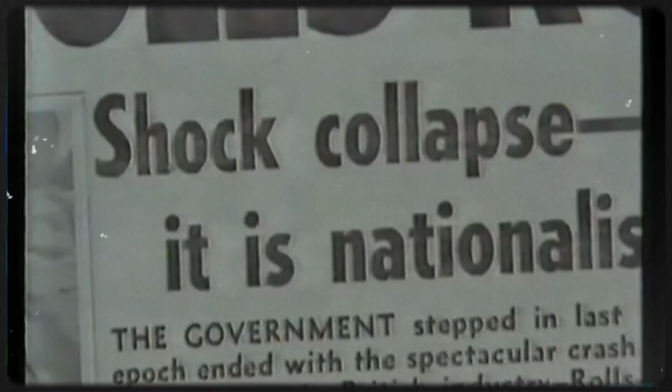On the morning of 4th February 1971, the assembly halls in Derby fell quiet. Rolls-Royce, the ultimate symbol of British engineering prestige, had collapsed into receivership. The company that built the Merlin to save Britain in wartime was now bankrupt, shattered by the financial weight of a single civil jet engine program.

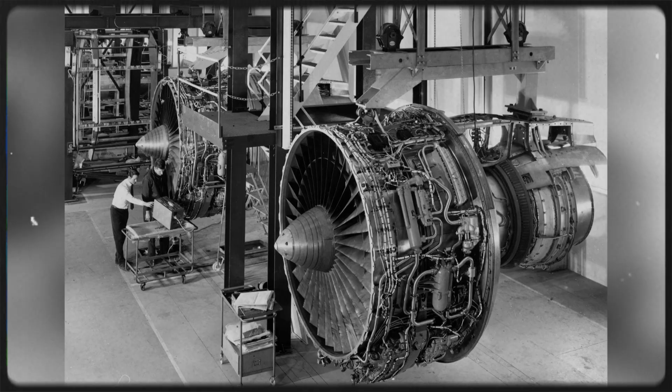The RB211, tied to a punishing fixed-price contract to power the Lockheed L-1011 TriStar, had development costs that spiraled completely out of control. Overnight, the livelihoods of thousands of factory workers and engineers hung in the balance, forcing an unprecedented emergency nationalisation by the state.

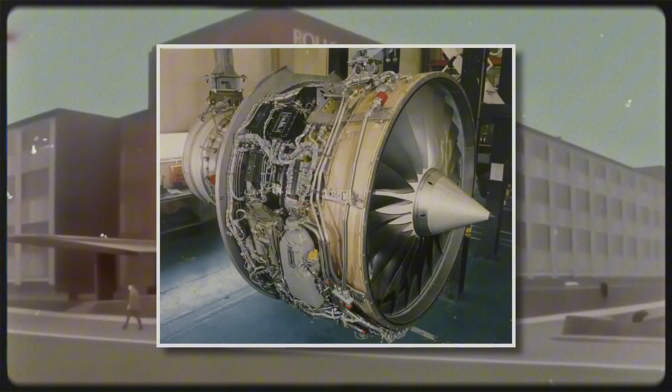It was a devastating paradox. On the test stands, the massive high-bypass turbofan was a mechanical masterpiece. Its three-shaft architecture promised to redefine global aviation. Yet that exact brilliance, relying on experimental materials and unforgiving deadlines, was bleeding its creator to death. But the real story of the RB211 is not only the story of a boardroom collapse, it is the story of how an engine that destroyed a British empire also became the only thing that could save it.

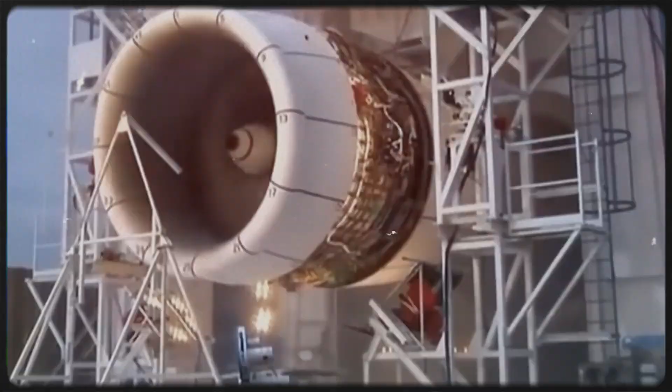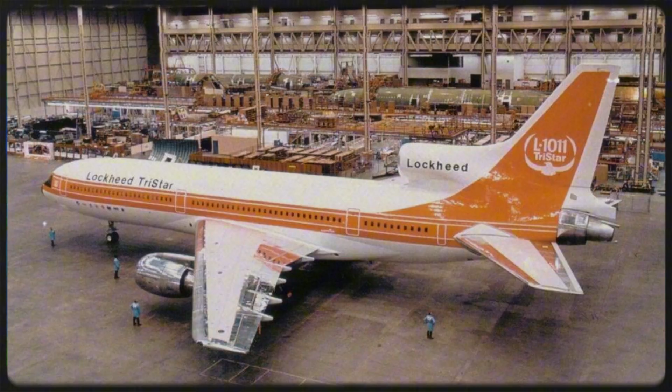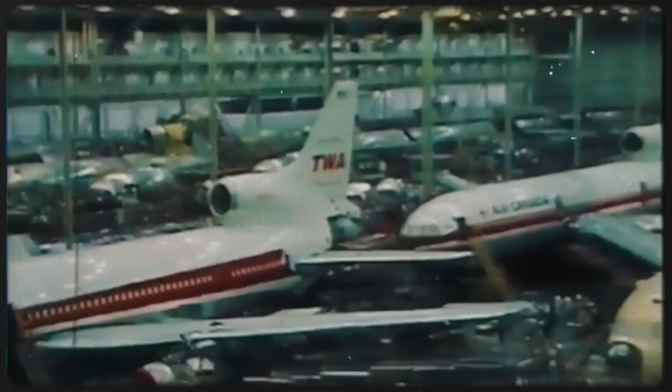The story begins not with nostalgia, but with a specific place, in Derby in 1968. In the middle of the 1960s, the global aviation market was shifting with a violence that British engineering had not anticipated. The era of the early narrow-body jet airliners, machines that had made air travel normal, was closing. Airlines were demanding a new kind of aircraft. They wanted wide-body jets capable of carrying hundreds of passengers in a single cabin, requiring a massive leap in thrust that existing engines simply could not provide.

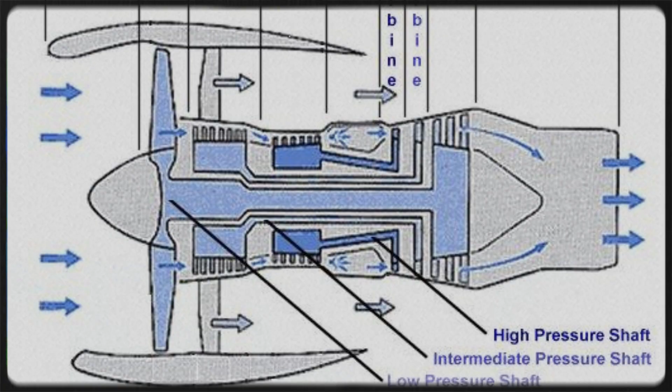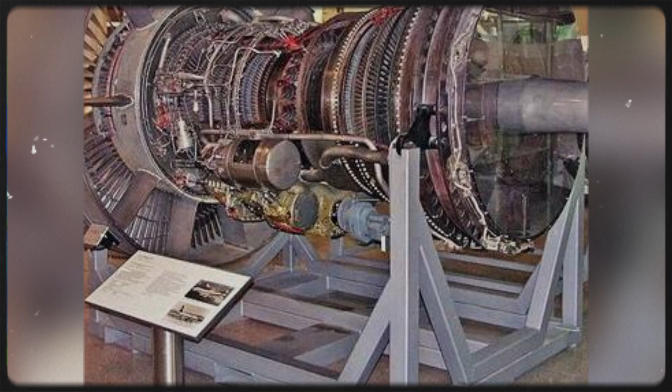To power these new giants, the world needed the high-bypass turbofan. A jet engine, a turbine engine that produces thrust by accelerating air and exhaust gases, was no longer enough. The new turbofan had to move much of its air through a large fan at the front, bypassing the core altogether. This drastically improved efficiency and thrust while reducing noise, a crucial factor as airports began facing noise restrictions.

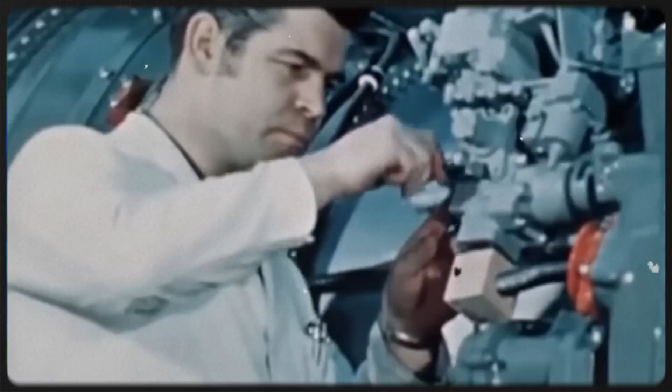In America, Pratt & Whitney and General Electric were already building these immense power plants. In Britain, there was only Rolls-Royce. For the aero engine division in Derby, the stakes were existential. If Rolls-Royce did not build a high-bypass turbofan, they would be locked out of the new wide-body market. If they were locked out of the wide-body market, they would cease to be a major global player, relegated to supplying niche aircraft and legacy fleets.

The British government, desperate to maintain its aerospace prestige, poured subsidies into Derby, demanding that the company secure a major contract to prove Britain still belonged at the top table of aviation.

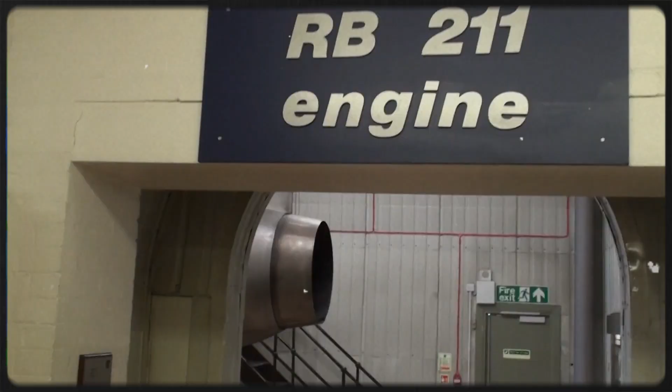The opportunity arrived in the form of the Lockheed L-1011 TriStar, a new wide-body airliner being developed in California. Lockheed needed an engine, and Rolls-Royce, driven by a mixture of engineering arrogance and commercial desperation, determined they would win the contract at any cost. In 1968, they did. Rolls-Royce secured the exclusive deal to power the TriStar, beating their American rivals. It was heralded as a triumph of British industry, a moment of national celebration.

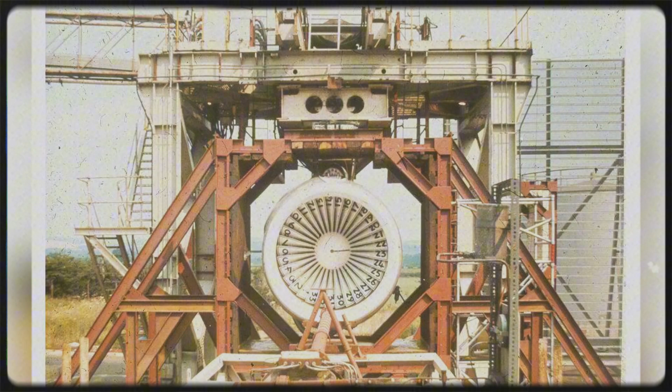But the victory was built on a foundation of terrifying risk. To win the contract, Rolls-Royce had promised an engine that did not yet exist. They promised it would be lighter, quieter, and more fuel-efficient than anything the Americans were building. More dangerously, they had signed a fixed-price contract, meaning they would absorb any development overruns themselves. And most dangerously of all, they had committed to a timeline that left almost no margin for error.

The signature was on the paper, the factory floors in Derby prepared for the future. But the British engineers still had to invent the technology to make the promises real.

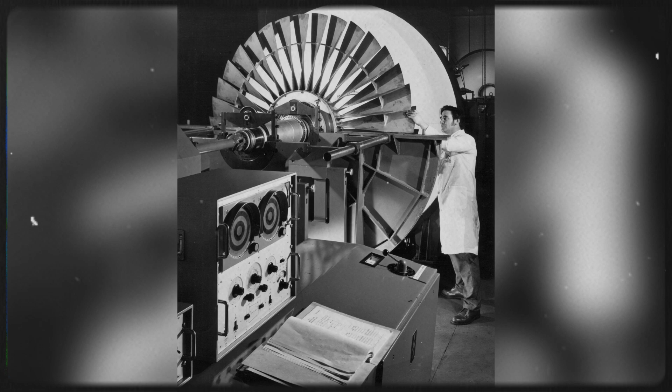In 1968, the ink on the fixed-price contract with Lockheed was barely dry. But the reality of what Rolls-Royce had promised was already settling over the factory floors in Derby. The British engineering team had committed to delivering a power plant that would outclass the best efforts of the American giants, Pratt & Whitney and General Electric.

The target was the Lockheed L-1011 TriStar, a wide-body airliner that required an engine capable of producing over 40,000 pounds of thrust. This was a colossal figure, more than double the power of the earlier Rolls-Royce Conway engines that had introduced Britain to the turbofan age.

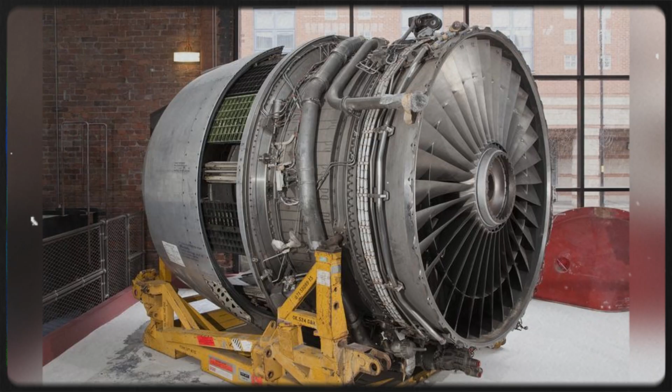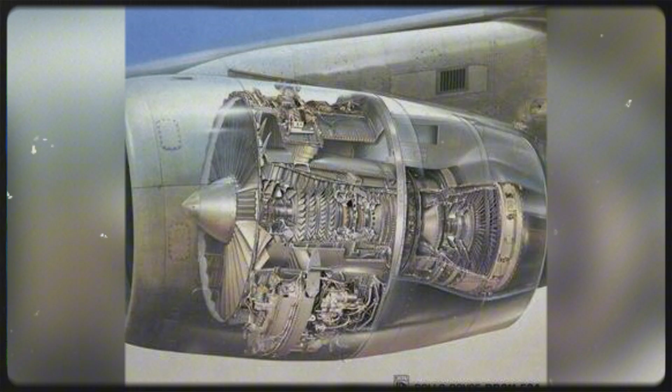To achieve this leap in power, the new engine could not simply be a scaled-up version of an older design. It had to be a high-bypass turbofan—a jet engine that moves much of its air through a large fan at the front, bypassing the combustion core altogether. This was the only way to generate massive thrust while reducing fuel consumption and noise. The vast volume of bypassed air acts as a cushion, wrapping around the hot, screaming exhaust gases from the core, silencing the roar that had defined the first generation of jets.

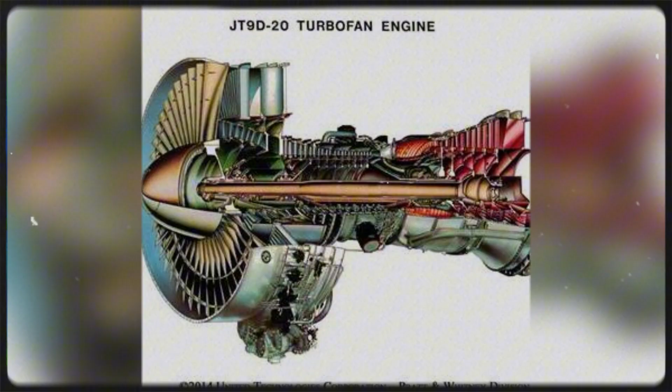But spinning a fan nearly 3 meters in diameter created a profound mechanical challenge. In America, Pratt & Whitney was developing the JT9D, and General Electric was building the CF6, using conventional two-shaft layouts. A shaft is the central spinning axis that connects the turbine sections at the rear to the compressor sections at the front. In a two-shaft engine, one shaft spins inside the other, allowing the high-pressure core and the low-pressure fan to rotate at different speeds. It was a proven, reliable method.

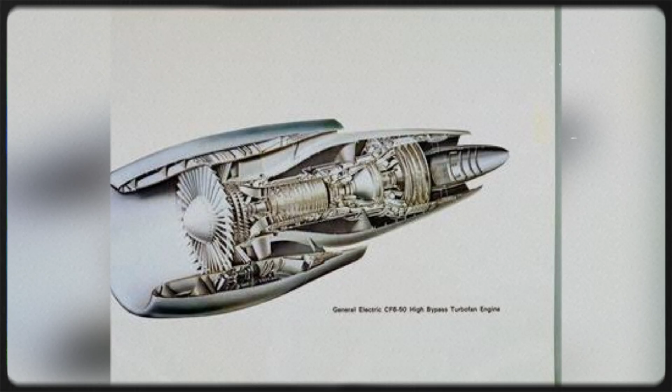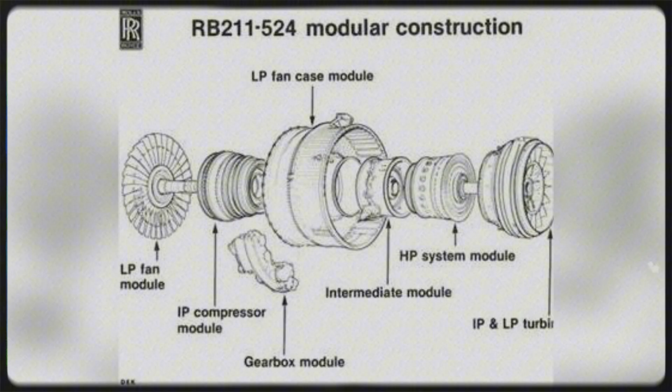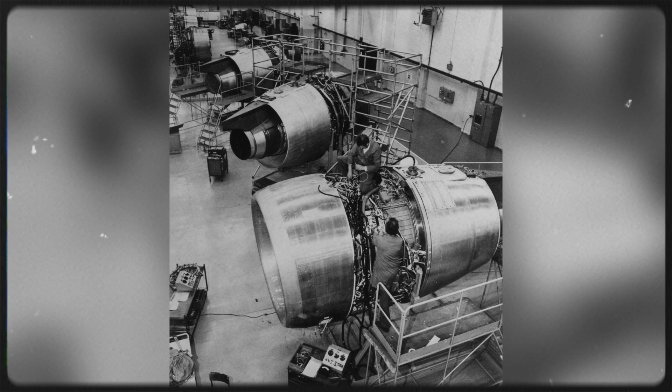But Rolls-Royce engineers, drawing on decades of aviation pedigree, decided that a two-shaft layout was too long and too flexible for an engine of this immense scale. They chose a path of radical, brilliant complexity. They would build the RB211 around a three-shaft architecture—a design where three concentric shafts spin independently inside one another. It was a mechanical masterpiece.

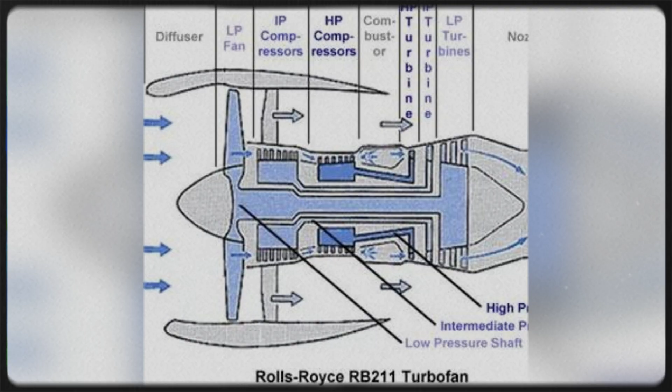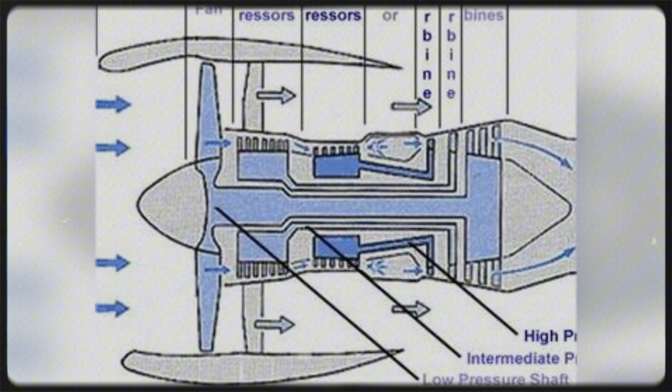In the machine shops of the Midlands, this meant an entirely new level of precision. Instead of two spinning axes, there were three: the innermost shaft would drive the massive front fan, the middle shaft would drive the intermediate pressure compressor, and the outer hollow shaft would drive the high-pressure compressor. For the machinists and fitters at Derby, this design was unforgiving—it required 3 sets of bearings, complex lubrication systems, and perfectly machined splines.

Yet the advantages were staggering. Because the engine was divided into 3 distinct thermodynamic zones, each section could spin at its own perfect aerodynamic speed. The compressor stages did not have to compromise. This allowed the engine to be significantly shorter, more rigid, and vastly more fuel efficient than its two-shaft American rivals. A shorter engine flexed less under the extreme aerodynamic loads of flight, meaning the rotating blades could sit closer to the outer casings without scraping them. Tighter clearances meant less air escaped, which meant greater efficiency.

This was the breakthrough that had won the Lockheed contract. Airlines like Eastern Airlines, Trans World Airlines, and later British Airways looked at the fuel economy projections and saw an engine that would revolutionize their fleet economics.

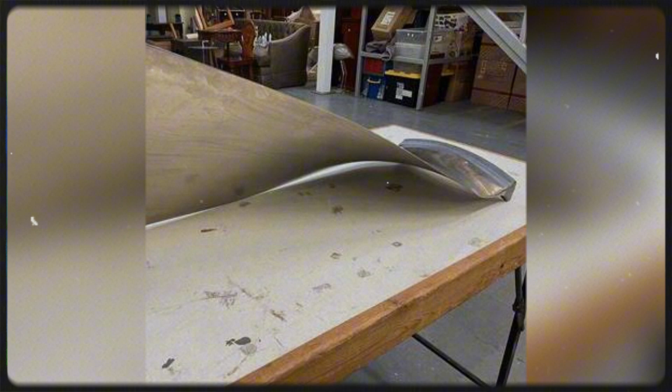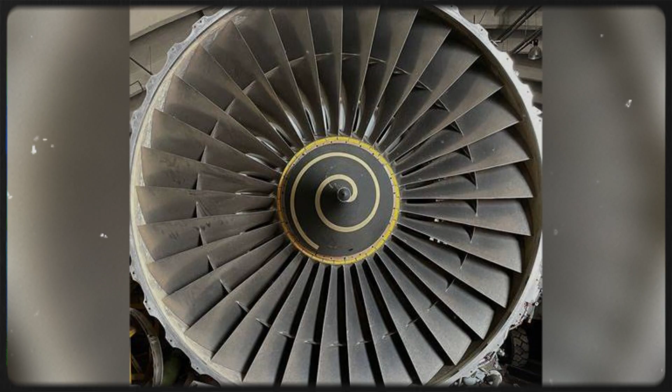But the three-shaft architecture introduced a secondary crisis: weight. The massive fan at the front of the RB211 required enormous blades. If these blades were forged from solid titanium, the industry standard material, the sheer rotating mass would be catastrophic. The fan disc holding the blades would have to be thicker, the bearings would have to be heavier, and the containment ring designed to catch a broken blade would have to be built like a bank vault. The total weight of the engine would obliterate Lockheed's strict limits, and under the fixed-price contract, Rolls-Royce would face immediate financial penalties.

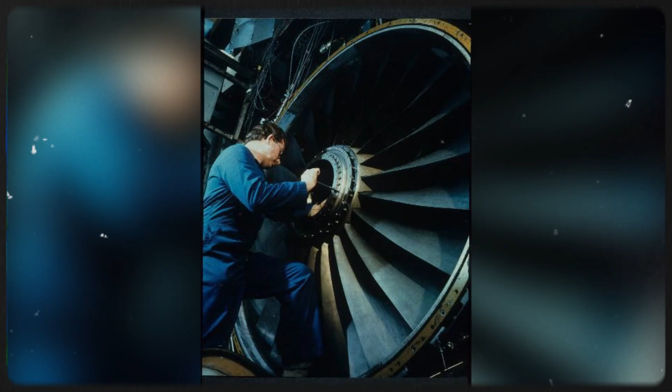To solve the weight problem, the British engineers turned to an experimental miracle material: carbon fiber. Rolls-Royce had developed a proprietary carbon fiber composite they called Hyfil. Carbon fiber, a material made of microscopic, immensely strong crystalline filaments of carbon embedded in a resin matrix, was incredibly stiff and phenomenally light. It promised a fan blade that was half the weight of traditional titanium.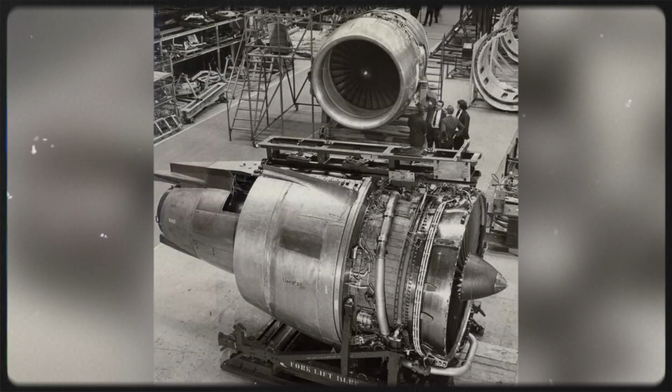In a British workshop, instead of forging hot metal, technicians would lay up sheets of black carbon fiber by hand, bonding them into the precise aerodynamic twist required by the fan. In the early test cells at Derby, the Hyfil blades seemed like an absolute revelation. When the prototype fans spun up, they sliced the air with a deep, resonant hum that mechanics had never heard before.

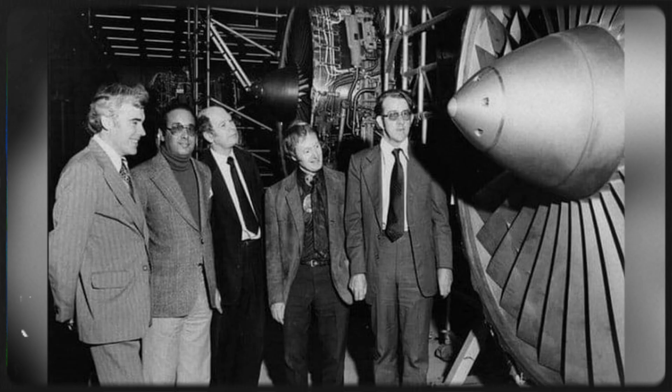The weight savings rippled backward through the entire engine. The fan disc was lighter. The containment casing was thinner. The RB211 was hitting its theoretical weight targets perfectly.

The aerospace press and government ministers marveled at the ambition. Rolls-Royce was not just building an engine—they were attempting to leapfrog the American aerospace establishment with a shorter, stiffer, three-shaft power plant spinning revolutionary black plastic blades. It was a staggering display of British mechanical pride.

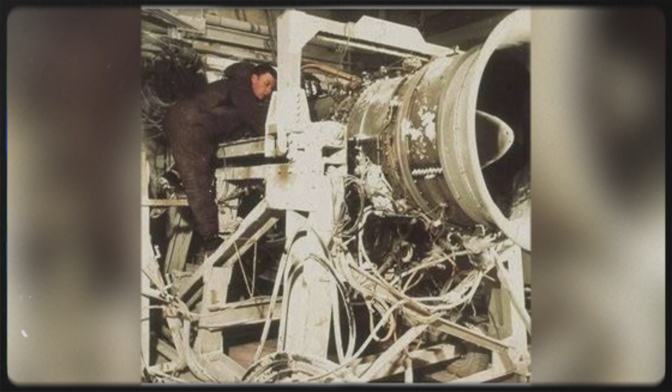The foundries poured the complex casings. The machine lines cut the intricate shafts. The vast test stands at Derby were reinforced and wired with analog telemetry to handle thrust forces that would have ripped earlier engines from their mounts. Everything was aligning. The mathematics worked, the architecture was brilliant, and the test cells waited for an engine that was about to meet the violent reality of the physical world.

By 1969, the development of the RB211 had consumed the town of Derby. This was no longer just an engineering program, it was an industrial crusade. To build a high-bypass turbofan of this unprecedented scale, Rolls-Royce had to transform its entire manufacturing footprint. The engine was so immense, nearly 3 meters across the fan face, that standard aviation assembly techniques were entirely inadequate.

In the assembly halls, the engines had to be built vertically, stacked like industrial monoliths over deep pits dug into the factory floor. If they attempted horizontal assembly, the sheer weight of the heavy casings would cause them to sag and distort before they were even bolted together. The precision required by the three-shaft architecture meant that every bearing, every spline, and every compressor blade had to be machined to tolerances that left absolutely zero margin for error.

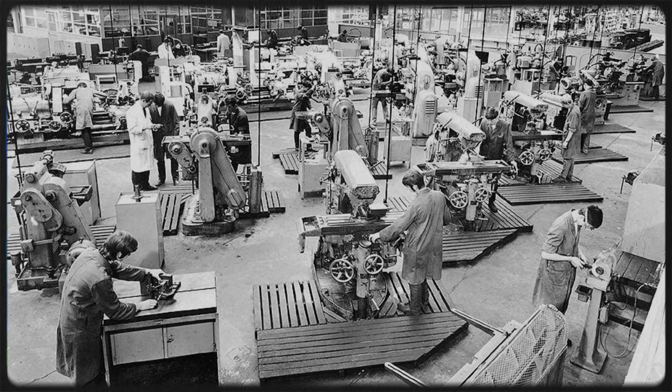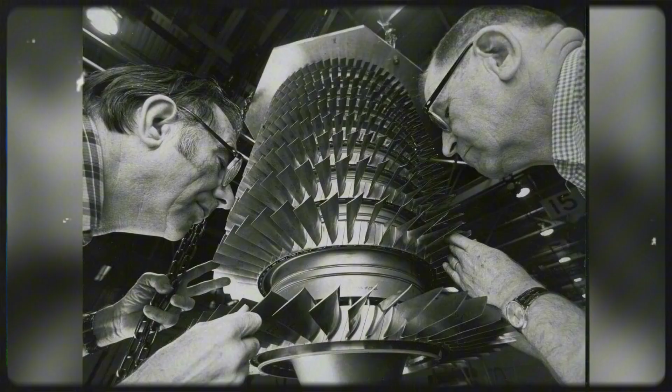The sheer volume of human effort was staggering. Thousands of draftsmen, metallurgists, machinists, and fitters were drafted onto the RB211 project. The foundries in the Midlands worked day and night pouring the complex aluminum and steel casings, while the machine shops carved the intricate titanium discs for the hot sections.

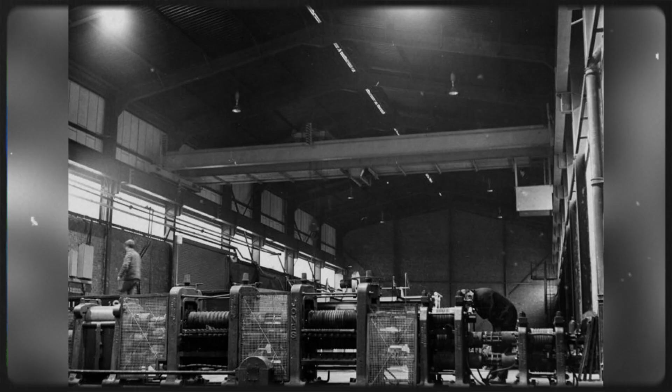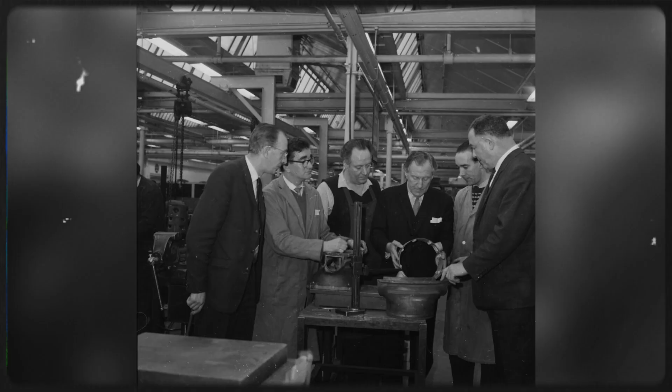Test cells that had once comfortably housed early Conway and Spey engines had to be drastically rebuilt, reinforced with thousands of tons of concrete and steel just to contain the violent thrust of the new era. The supply chain stretched across Britain. Specialist subcontractors from Coventry to Sheffield were drawn into the orbit of the RB211, feeding high-grade materials, fasteners, and auxiliary components into the Derby lines. The engine was driving a whole ecosystem of British manufacturing, pushing the metallurgical limits of what could be reliably mass-produced.

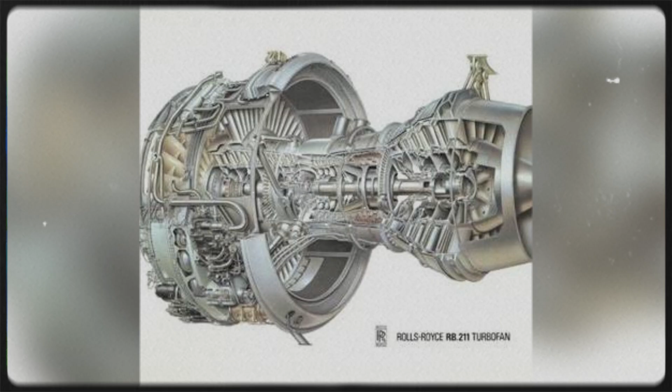Inside the high-pressure core of the engine, temperatures were designed to exceed the melting point of the turbine blades themselves. To prevent them from disintegrating, the blades had to be intricately cast with microscopic internal cooling channels, bleeding cooler air from the compressors to create a protective boundary layer of air over the spinning metal. It was a thermodynamic high-wire act.

The British government, watching from London, treated the Derby factory floor as a strategic national asset. The state was pouring millions of pounds of launch aid into the project because the RB211 was the only British response to the American wide-body dominance. Lockheed engineers frequently traveled from California to the Midlands, walking the production lines, inspecting the black Hyfil carbon fiber blades being laid up by hand, and waiting for the power plant that would lift their TriStar into the sky.

In a Britain where a jet engine decided whether a national industry survived the transition to the wide-body age, whether thousands of Midlands machinists kept their livelihoods, and whether the country remained an independent aerospace power, the RB211 was not an abstraction. It was metal, fuel, labor, heat, sound, repair, extreme financial risk, and a terrifying amount of trust.

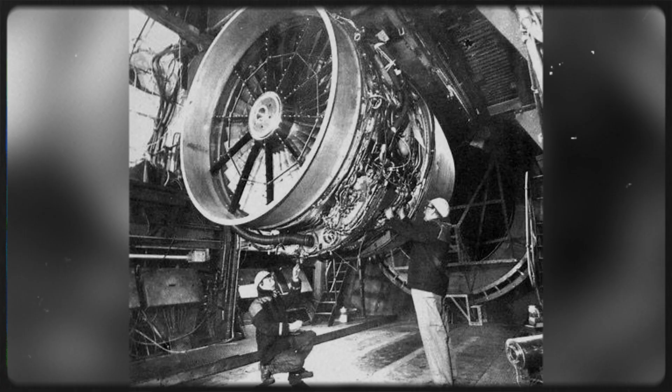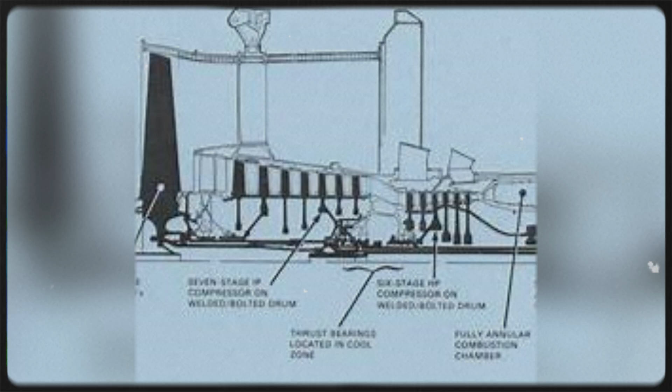When the first prototypes were finally wheeled out to the test stands, the sound they made was a revelation. It was not the high-pitched tearing scream of the early jets. Because the vast majority of the air bypassed the hot core, the exhaust was wrapped in a slower, cooler cushion of air. The result was a deep, earth-shaking rumble, a low-frequency bass that vibrated through the chest cavities of the engineers standing in the observation bunkers.

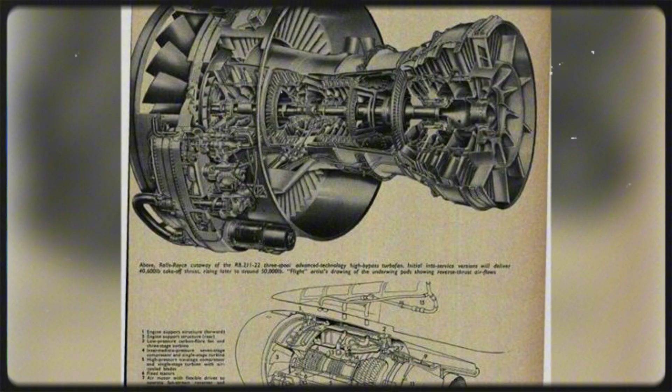As the throttles were pushed forward, the telemetry dials spun. The three concentric shafts spooled up independently, finding their perfect aerodynamic balance. The massive black fan bit into the air, pulling tons of atmosphere through the inlet every second. The thrust figures climbed, 20,000, 30,000, and finally approaching the monumental 40,000-pound target.

The mathematics had been proven in steel, titanium, and carbon fiber. The three-shaft architecture was working. It was a moment of supreme, intoxicating confidence for British engineering. The engine was producing the power they had promised the world.

But scale at this level is a brutal master, and a turbine roaring in a heavily instrumented test cell had not yet faced the chaotic reality of the sky.

To understand the sheer industrial momentum of the RB211 program by 1970, one had to stand near the Sinfin test site in Derby. A test cell, a heavily reinforced concrete bunker designed to hold a jet engine running at maximum power while sensors monitor every vibration, temperature, and pressure change, was no longer just a laboratory. It was the beating heart of the Midlands.

When the three-shaft engine spooled up to its maximum rating, it consumed tons of aviation fuel per hour, accelerating a column of air so massive that the low-frequency rumble could be felt in the chest cavities of workers miles away. This single engine family was supporting an entire British industrial ecosystem.

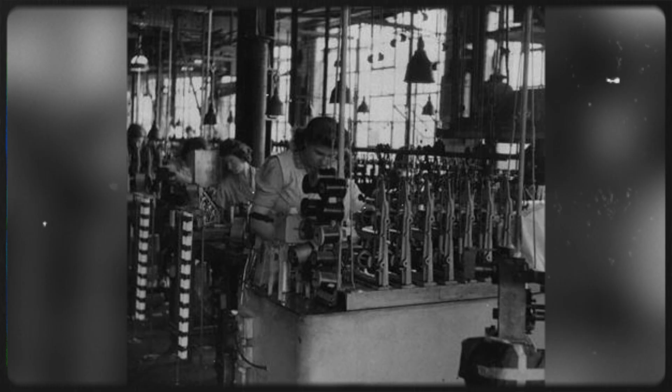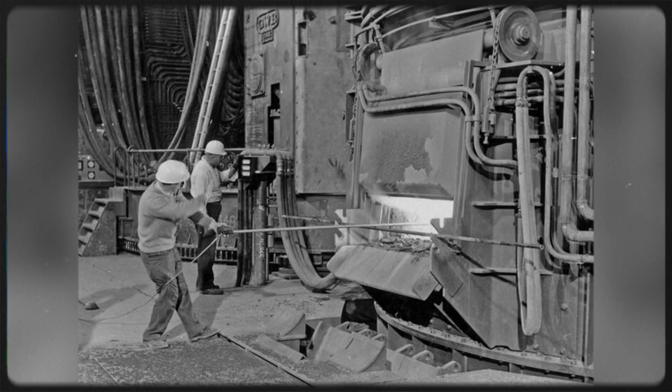Rolls-Royce employed over 80,000 people globally, but the aero engine division in Derby was the nerve center. The project pulled in suppliers from across the country. Lucas Aerospace was tasked with developing the complex fuel systems required to feed the high-pressure core. Smiths Industries provided the intricate instrumentation. Forges in Sheffield delivered the raw titanium billets. An entire generation of British engineering apprentices was trained on the uncompromising tolerances of the RB211's concentric shafts.

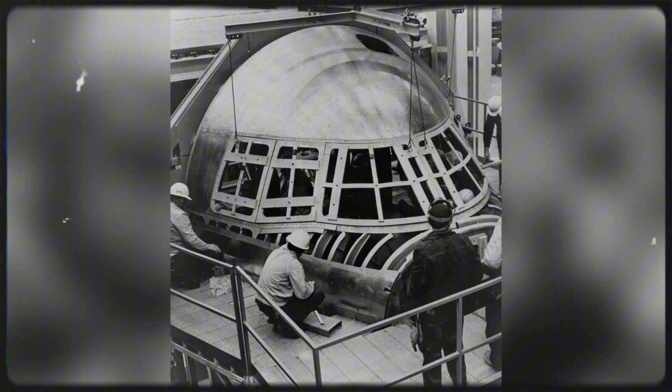Across the Atlantic in Palmdale, California, Lockheed was assembling the massive airframes of the L-1011 TriStar. The aircraft was a wide-body masterpiece, designed to carry up to 400 passengers in near-silent comfort, but it was entirely dependent on the British power units. Lockheed had designed the TriStar exclusively around the RB211. There was no alternative engine option. If Derby failed, Lockheed failed.

For a brief, intoxicating period, the gamble seemed to have paid off brilliantly. The prototype engines, fitted with the revolutionary black Hyfil carbon fiber fan blades, were hitting their aerodynamic targets. Airline executives from Eastern Airlines, Transworld Airlines, and Air Canada reviewed the telemetry data and saw a power plant that would fundamentally change the economics of mass air travel.

The RB211 was shorter, more rigid, and significantly quieter than its American two-shaft rivals, the Pratt & Whitney JT9D and the General Electric CF6. At the Farnborough Air Show, the British aerospace press declared that Rolls-Royce had not only caught up to the Americans in the wide-body era, they had mathematically surpassed them.

This was the zenith of post-war British mechanical optimism. The assembly halls at Derby were running day and night. The foundries glowed with poured metal. The state, having provided millions in launch aid, viewed the engine as a symbol of national capability.

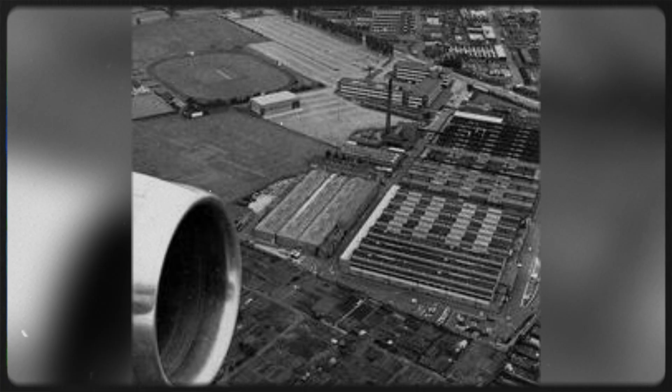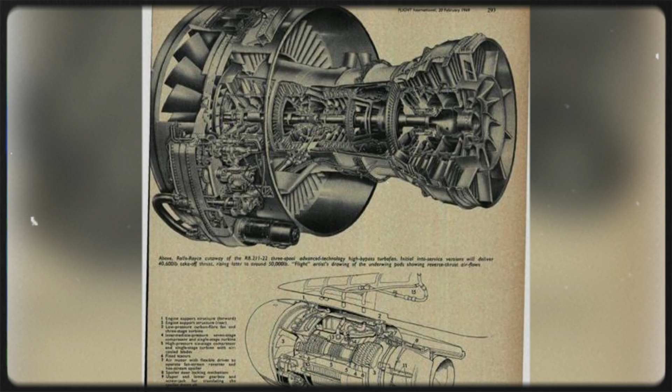The RB211 was physical proof that Britain could still build the heaviest, most complex, and most valuable industrial machines on Earth. The mathematics worked. The architecture was flawless. The three independent shafts spun in perfect thermodynamic harmony. The British government, the Lockheed executives, and the Derby workforce believed they had definitively secured the future.

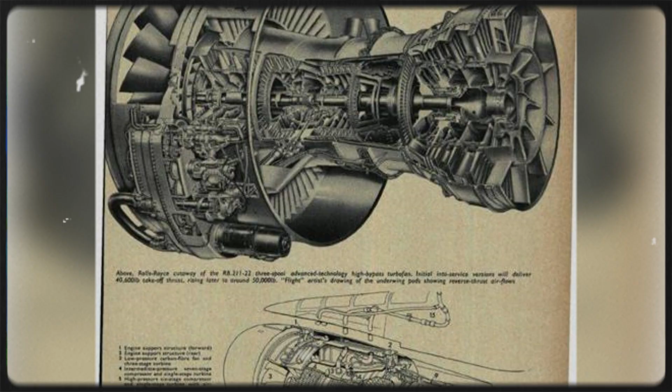But a high-bypass turbofan singing on a static test stand in the Midlands had not yet faced the violent, unpredictable reality of the sky. The first crack in the RB211 program was not financial, it was physical, and it happened in a fraction of a second inside a testing bunker at Derby.

A high-bypass turbofan ingests tons of air per minute, which means it will inevitably ingest anything occupying that airspace, including large birds. To achieve aviation certification, an aero engine must prove it can suffer a severe bird strike at takeoff thrust, safely contain the damage, and allow the aircraft to return to the ground.

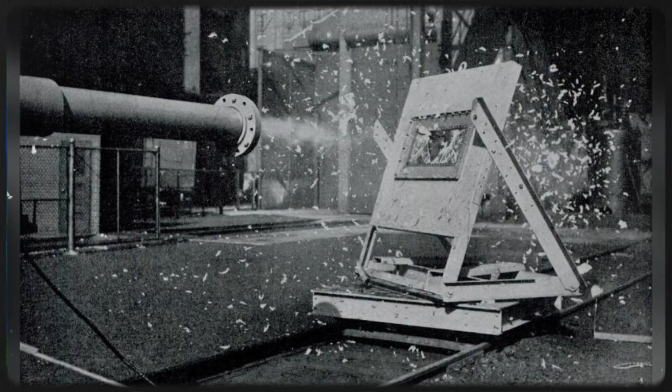In a specialized test cell, British engineers simulated this violent reality by firing thawed bird carcasses from a pneumatic cannon directly into the spinning black fan of the RB211. What happened next shattered the optimism of the entire project.

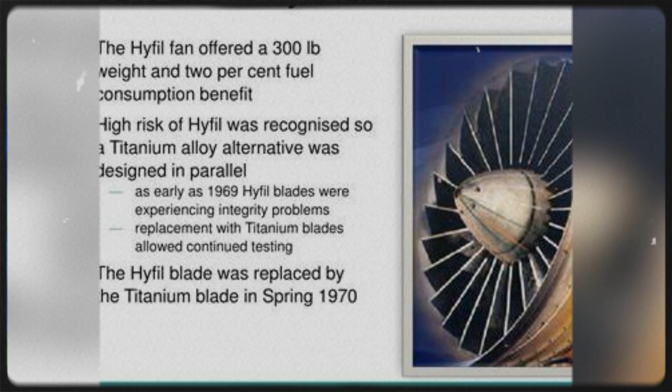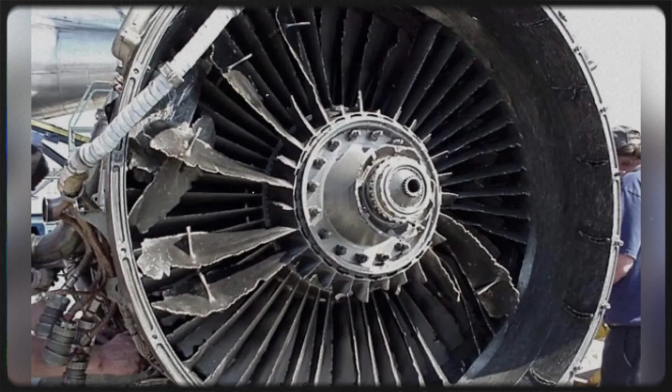The revolutionary Hyfil carbon fiber blades were incredibly stiff and phenomenally light, but they possessed a fatal metallurgical weakness. They lacked the ductile strength of forged metal. When the heavy impact struck the composite material at high speed, the Hyfil blades did not merely dent or bend, they shattered. The sheer kinetic energy delaminated the carbon layers, sending jagged, catastrophic shrapnel backwards into the delicate high-pressure core. The engine tore itself apart on the stand.

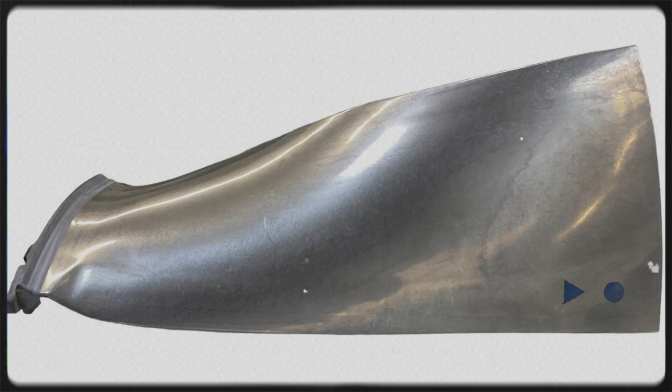Engineers frantically attempted to solve the problem by reinforcing the leading edges of the black blades with steel shields, but the composite resin simply could not absorb the blunt force trauma of a major strike. The physics were absolute. Rolls-Royce was forced to abandon the Hyfil dream. They had to return to conventional, solid titanium fan blades.

This single engineering retreat triggered a catastrophic chain reaction that would tear the company apart. The crisis was driven by the brutal reality of Force One: iron, aluminium, fuel, and manufacturing costs.

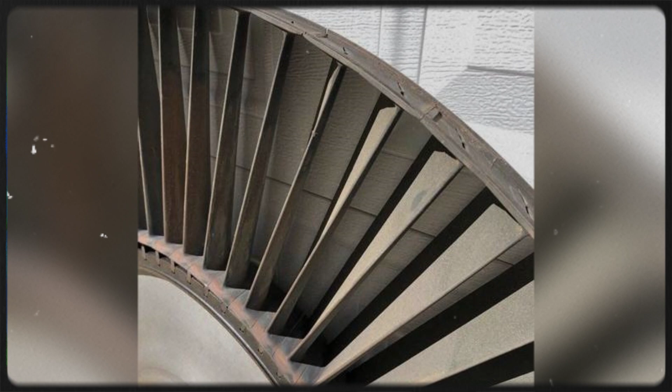Titanium is a magnificent aerospace material, but it is vastly heavier than carbon fiber. By switching the enormous front fan to solid titanium blades, the rotating mass at the front of the engine immediately doubled. Because the fan was now twice as heavy, the intricate fan disc that held the blades had to be redesigned and thickened to handle the massive new centrifugal forces. Because the fan and disc were heavier, the front bearing assemblies had to be uprated.

And because a broken titanium blade is essentially a heavy, high-velocity projectile, the outer containment casing, designed to stop a broken blade from slicing through the aircraft fuselage, had to be massively reinforced with layers of heavy steel and Kevlar. Overnight, the RB211 became severely overweight.

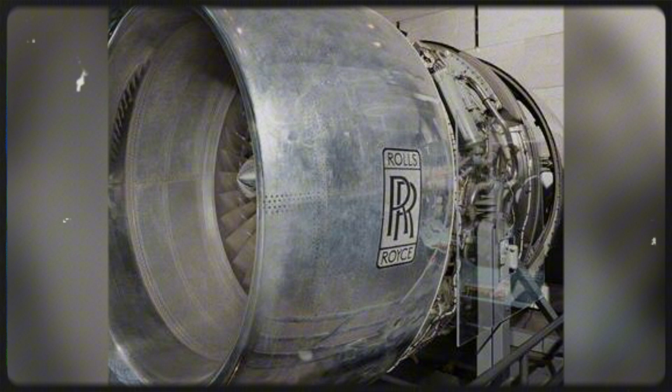This weight penalty destroyed the delicate thermodynamic balance of the three-shaft architecture. A heavier engine required the Lockheed TriStar to burn more fuel just to carry the power plants. To restore the promised fuel economy and thrust guarantees that Lockheed had legally locked into the contract, the Rolls-Royce engineers had to push the high-pressure core harder.

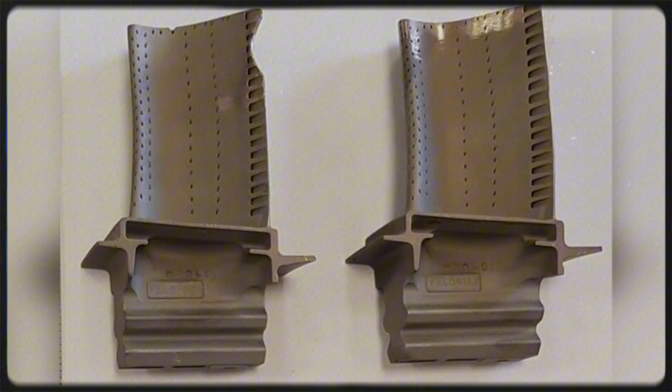They had to raise the internal operating temperatures, which required entirely new, highly complex cooling channels to be machined into the turbine blades so they would not melt. The RB211 was essentially being redesigned in real time on the factory floor, while the clock ticked down to Lockheed's delivery deadlines. The financial consequences were devastating.

Under the fixed-price contract signed in 1968, Rolls-Royce could not pass these massive new research, development, and manufacturing costs onto Lockheed. Every pound spent redesigning the titanium fan, testing new containment rings, and remachining the hot section came directly out of the reserves in Derby.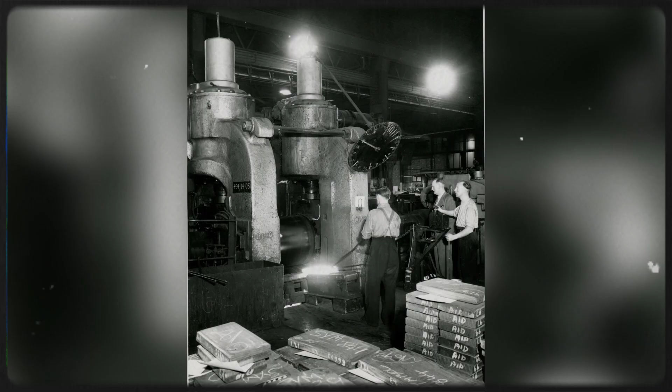At the same time, the project was battered by the external pressures of Force 4: fuel, oil, austerity, supply chains, and energy shocks. As the 1970s dawned, Britain was gripped by severe economic inflation. The cost of raw materials, particularly the high-grade aerospace titanium being forged in Sheffield, was skyrocketing. Labor costs across the Midlands were rising as unions demanded higher wages to match the inflating cost of living.

The original cost estimates that Rolls-Royce had presented to the British government and Lockheed were completely detached from the new reality. By the autumn of 1970, the accountants in Derby realized the terrifying scale of the disaster. Because of the fixed-price agreement and the soaring inflation, Rolls-Royce was losing millions of pounds in development.

Even worse, calculations showed that once the assembly lines actually started full production, the company would lose hundreds of thousands of pounds on every single RB211 they shipped to California. The more engines they built, the faster they would bleed to death.

In a desperate bid to survive, Rolls-Royce executives approached the British government for a massive emergency bailout. The state, horrified at the prospect of losing its premier engineering institution, initially agreed to inject tens of millions of pounds in additional launch aid, but it was like pouring water into a shattered vessel. The R&D burn rate at the Sinfin test site was consuming cash faster than the Treasury could print it.

The engineers in the machine shops were finally beginning to solve the titanium weight problem, pushing the three-shaft design to work perfectly with the heavier metal. But the mechanical triumph was too late. The system around the engine had already collapsed, and the British winter was about to bring the final reckoning.

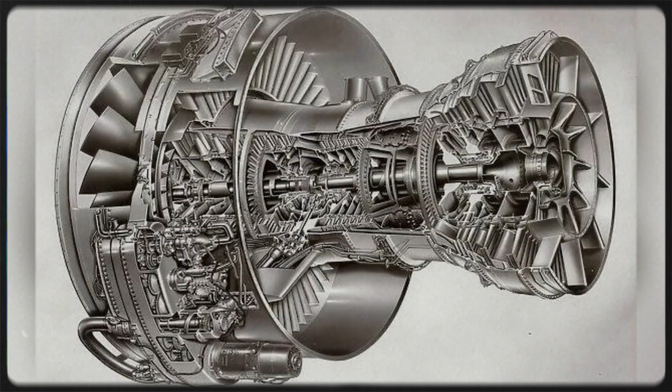The British government, led by Prime Minister Edward Heath, commissioned an independent audit of the program. The resulting numbers were catastrophic. To finish the engine, certify it for passenger flight, and fulfill the Lockheed contract, the state would need to commit hundreds of millions of pounds in further subsidies with no guarantee of ever turning a profit. For a conservative government fundamentally opposed to state intervention, it was an ideological nightmare.

Across the Atlantic, the panic was equally severe. Lockheed's chairman, Daniel Haughton, made desperate transatlantic flights to London, begging the British government to keep the Derby assembly lines moving.

Lockheed had staked its entire corporate existence on the L-1011 TriStar, and the aircraft was designed exclusively around the physical dimensions of the RB211. There was no backup engine. If Rolls-Royce stopped building the power plant, Lockheed would almost certainly go bankrupt, pulling down a vast network of global aviation trade.

In the Midlands, the human toll of the crisis was beginning to manifest. The town of Derby was effectively built around the engine company. For generations, securing an apprenticeship at Rolls-Royce meant a job for life, a promise of stability forged in aluminum and steel. Now the machinists cutting the complex turbine discs and the fitters assembling the high-pressure cores worked under a cloud of existential dread. The factories were still deafeningly loud.

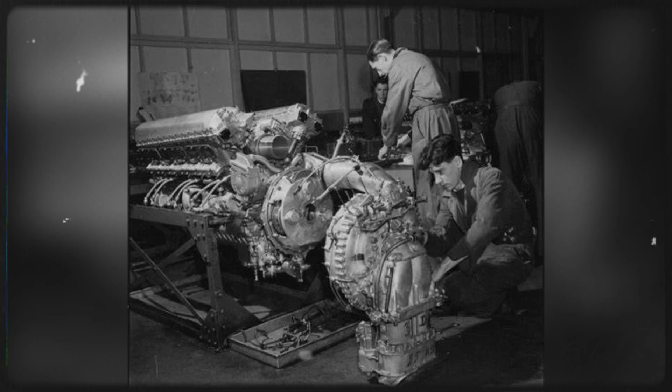The massive test stands at the Sinfin site felt like the monuments of a failed empire. Force 7: nationalisation, privatization, and brand survival, was about to rewrite the history of British engineering.

The British government could not let the aerospace capability of the nation vanish overnight. In an unprecedented and deeply reluctant move, the state intervened. They nationalized the aero engine division, taking it entirely into public ownership to guarantee the survival of the RB211 and to prevent Lockheed's immediate collapse.

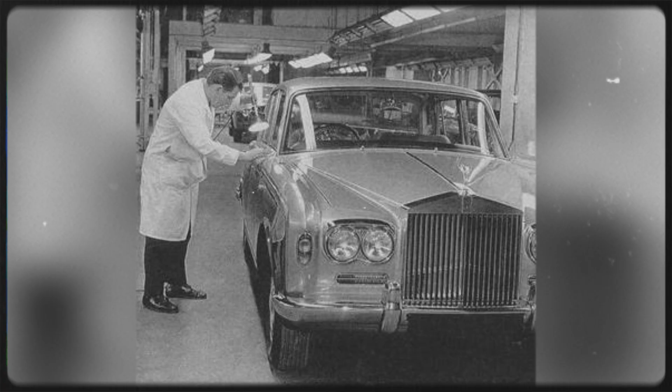The famous luxury car division in Crewe, which was still profitable and completely untainted by the jet engine disaster, was severed from the parent company and eventually privatized. The legendary Rolls-Royce name was cleaved in two, separated into entirely different corporate entities. The brand was saved, but the old, proud, independent company that had confidently challenged the American giants in 1968 was gone forever.

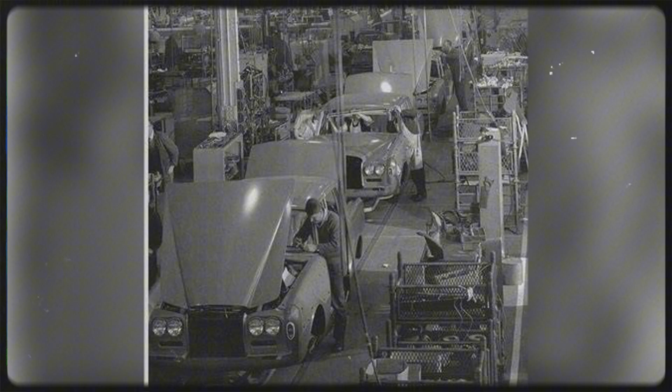In the midst of this corporate carnage, Hooker's engineering team finally achieved the impossible inside the heavily reinforced test cells. The redesigned, heavier RB211 began to hit its thrust targets. The three-shaft architecture, freed from the impossible constraints of the original budget, finally delivered the incredible thermodynamic efficiency it had promised years earlier. It was a mechanical triumph, built on top of a financial ruin.

The engine finally worked. The massive fan turned. The titanium held together. The test cells roared. The thrust targets were met, but the money had vanished. The independent empire fell. The badge remained. The company behind it had changed forever. The company was nationalized. The old name was broken. But inside the hangars at Derby, the heavy, expensive, delayed engine was finally ready to fly.

The L-1011 TriStar finally entered commercial passenger service in 1972. By the time the massive wide-body aircraft carried its first passengers into the sky, the world around its engines had irrevocably changed. The independent British company that had designed the power plants was dead, decisively split apart by the government. The luxury car division in Crewe had been spun off into a separate, private entity. The aero engine division in Derby was now a state-owned enterprise, rescued from absolute oblivion by the taxpayer.

But up in the cold, thin air of the upper troposphere, the RB211 was doing exactly what its engineers had promised it would do.

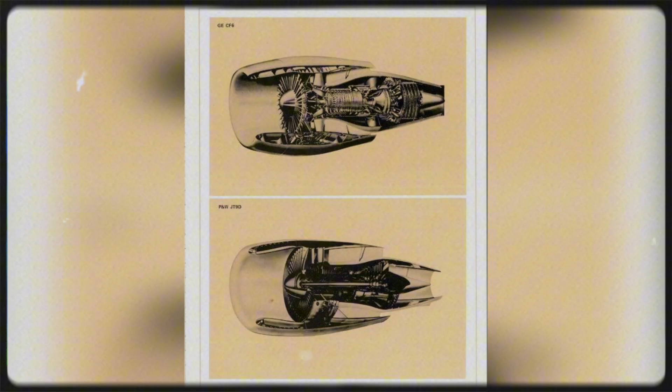As the TriStars flew their transatlantic routes, airlines quickly realized that the Rolls-Royce power plants were consuming significantly less fuel than their two-shaft American rivals, the Pratt & Whitney JT9D and the General Electric CF6.

The RB211 was so good that its survival ultimately outlasted the aircraft it was originally built for. Lockheed, battered by the delays and fierce aerospace competition, eventually abandoned the commercial airliner market altogether, but the British engine lived on. By the late 1970s, Boeing realized the sheer potential of the Derby design and offered the RB211 as an option on the Boeing 747 jumbo jet.

It fundamentally transformed the long-haul economics of the aircraft. British Airways, Cathay Pacific, and Qantas ordered vast fleets of 747s powered by the Derby engines, relying completely on a machine that had once been considered a catastrophic national failure.

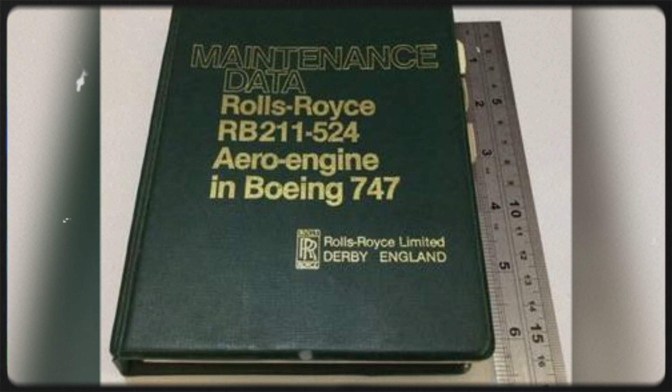Today, the memory of that crisis survives in the hands of the people who built it. In Midlands pubs and local historical societies, retired machinists and fitters still talk about the bitter winter of 1971. In transport museums, aviation archives, and auto jumbles across the country, you can still find the thick, oil-stained service manuals for the early RB211 variants.

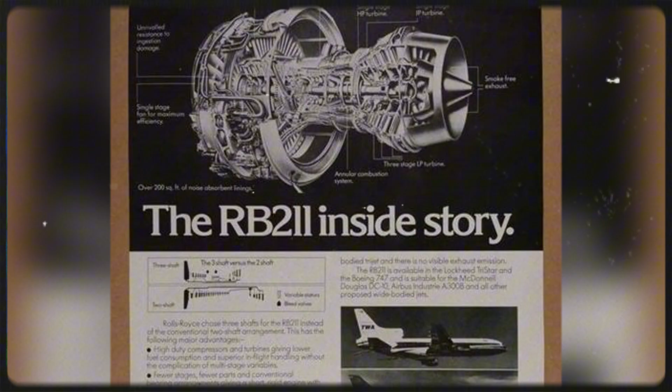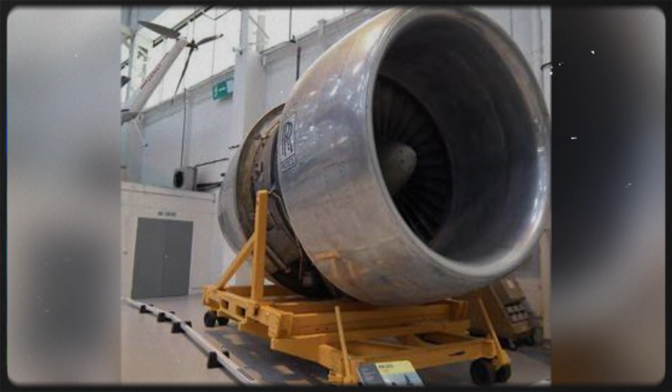These heavy binders, filled with exploded technical diagrams of the three concentric shafts, are physical artifacts of a time when human hands had to perfectly align metal to contain over 40,000 pounds of thrust. The British preservation community, the engineers and volunteers who maintain historic aviation displays at places like the RAF Museum or Duxford, know exactly what this power plant represents.

This is where the story of the RB211 separates itself from mere industrial nostalgia. When we look back at the collapse of British motorcycle empires, the silent triumph twins outside old cafes, or the demise of British Leyland, we usually see a story of obsolete machinery being overtaken by a changing world.

The RB211 is the exact opposite. The engine did not fail because it was obsolete. It failed because it was too far ahead of the financial and metallurgical reality of its time.

Today, if you walk onto the factory floor at Derby, or look closely at the engines hanging beneath the wings of a modern Airbus A350 or Boeing 787, you will not see the RB211 name. You will see the Rolls-Royce Trent.

But the Trent family, the engine family that dominates modern global aviation, is simply the direct evolutionary descendant of the RB211. The Trent engines still use the exact same three-shaft architecture that broke the original company.

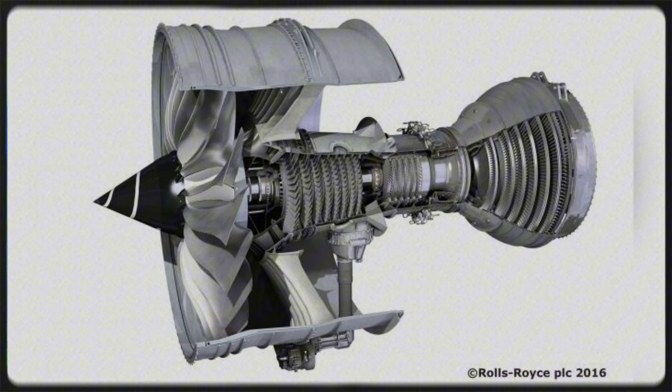And in a final, profound twist of engineering irony, the modern Trent engines use hollow titanium blades and advanced composite materials. The black carbon fiber fan blades, the Hyfil dream that shattered under the bird strike test and triggered the bankruptcy, eventually became the global aerospace standard.

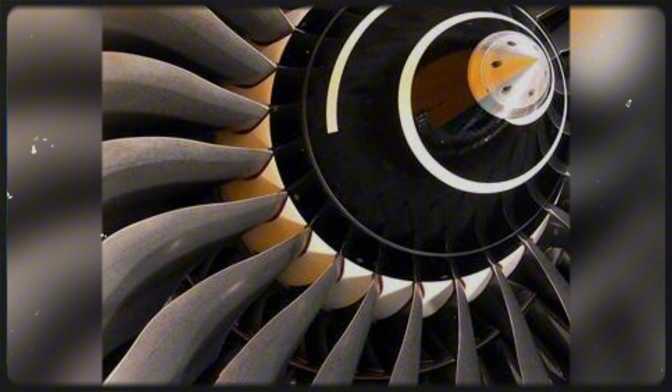The British engineers in 1968 were not wrong about the physics. They were just 30 years too early for the chemistry.

A machine can be mathematically perfect, mechanically brilliant, and entirely necessary for the future, yet still destroy the system that tries to build it under the wrong contract.

The RB211 proved that the cost of an engineering revolution is sometimes higher than a single company can bear. Britain lost an independent corporate empire in February 1971, but in exchange it secured a permanent place in the modern wide-body age.

The engine kept the foundries pouring, the machine shops cutting, and the Derby test cells roaring into the 21st century. It was the price of survival, forged in titanium and paid for in crisis.

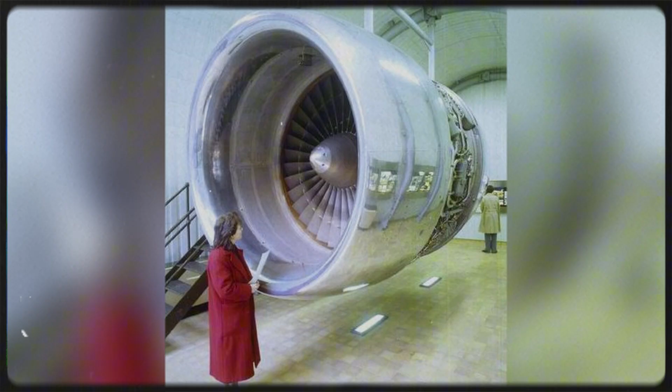Somewhere in a British aviation museum, an early RB211 now sits silently on a steel display stand. The intricate concentric shafts are motionless. The heavy titanium fan blades gather a fine layer of dust under the gallery lights, holding on to the memory of a time when a single screaming turbine nearly broke a nation's pride, and then carried it into the future.